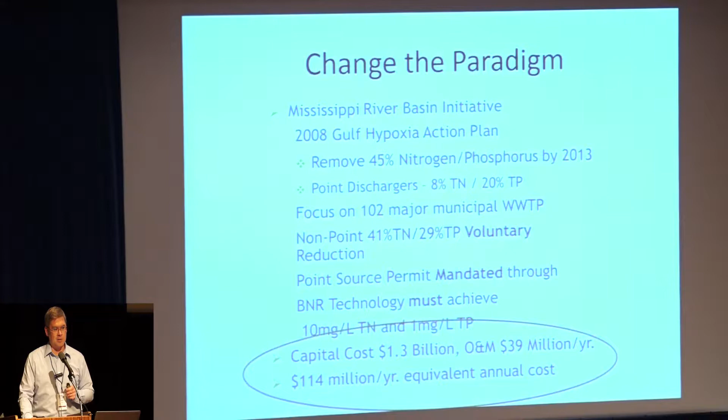Taking a different perspective, looking at things differently as we change the paradigm, because we have to. If you look at the wastewater pending regulations, the additional capital costs, the operations and maintenance costs - it's going to require us to change the paradigm of how we view management of water as a resource in our communities.

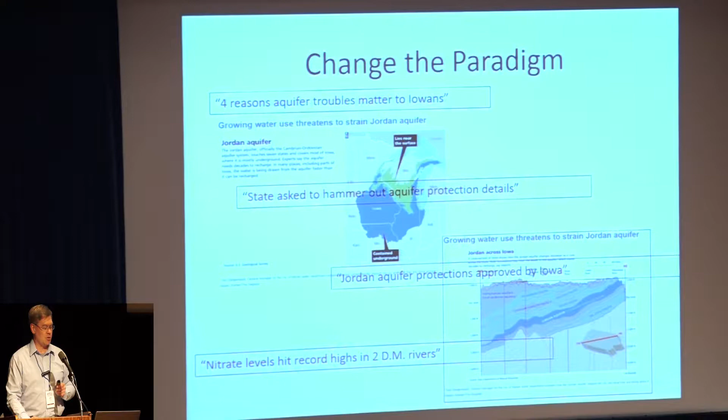If you look at the issues we're facing from a water supply standpoint, and the impacts that can have from an economic development standpoint, a community health standpoint, all those types of issues - we need to change the paradigm. At the same time, we're dealing with issues with flooding, we're dealing with issues with droughts, we have questions about future water supply in particular parts of the state.

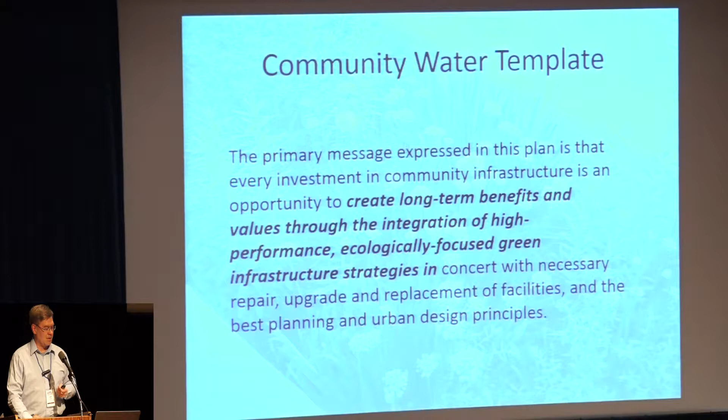So that's what we're going to talk about for the rest of the time we have this afternoon. The Iowa Economic Development Authority partnered with the City of Storm Lake last year to develop what we were calling a community water template. It's really looking at, from a community-wide perspective, how do we integrate and plan for water, wastewater, and stormwater in a holistic fashion. We're going to talk about how you renovate public-private properties, high-performance materials and systems, and the multiple benefits and values you can get from taking an integrated approach to infrastructure. Looking at how you look at your community and infrastructure as an asset, how you best leverage that portfolio to create long-term benefits and values through integration of high-performance, ecologically focused green infrastructure strategies. And with that, I'm going to turn it over to Jim Patrick to provide the city perspective, and then Tom Price will get into the template.

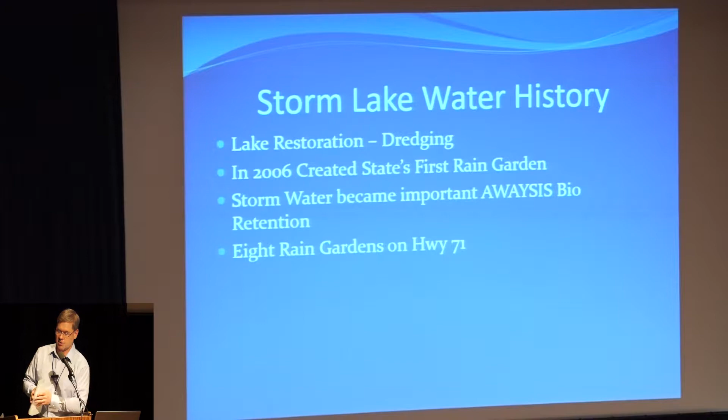Thank you. It's a privilege to be here to talk about Storm Lake a little bit and water resources. Again, our history in Storm Lake is tied to the lake primarily, and we've been doing dredging. We're on our probably second or third iteration of dredging, and on this iteration we're probably about 10 or 11 years into the process.

So taking care of water quality is important to us in the lake. It's one of the two fisheries for walleye in the state, and we try to do our best in taking care of the lake. In 2006, we had the opportunity to create the state's first rain garden, and you'll see some pictures a little later on, I think, on that one. When we put our resort in place, stormwater became even more important, and that was back around 2008, 2009. Being right on the lake and trying to sell the lake made it even more important for us to take care of stormwater. And then, along the way there in about 2008, 2009, we put in some rain gardens.

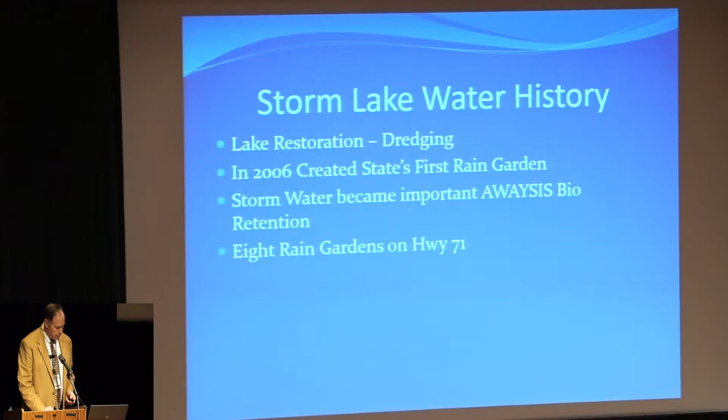So, keeping with the theme of what Jeff said, we as city managers or city staff a lot of times think about things being the same, and we become complacent and pretty well in tune with what we're doing. It comes natural to us, we've done it a thousand times, and nothing could go wrong, right? Well, think again.

Since 2010, council was kind of interested in stormwater to a certain degree. 2010 we had a shift in thinking, and stormwater management and environmental issues became so important that it became one of the 5 core topics in our strategic plan for the city.

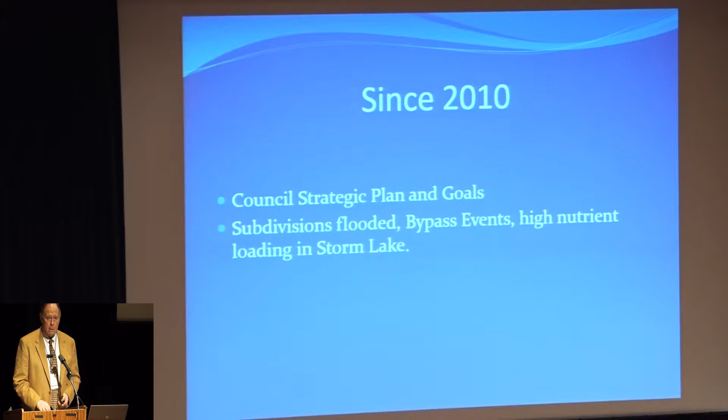Along with that, probably part of that, we had subdivisions that were flooding out. And when I say flooding out, a lot of times water would be up to the doorstep. We had bypass events in the city. Stormwater was a nuisance, I'll tell you that right now, flooding basements and flooding streets.

We were able to secure some FEMA funds to enlarge our wastewater treatment plant, put in some additional sewer mains, and do some work in getting rid of the I&I, the water we were dealing with.

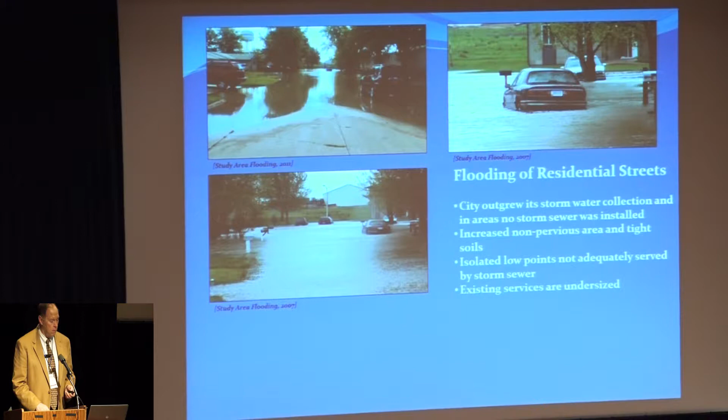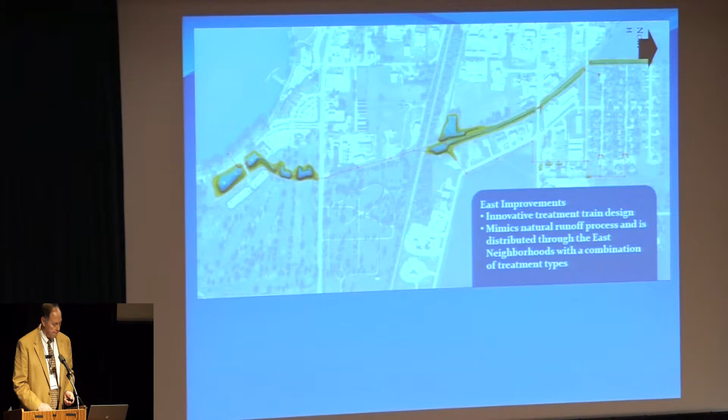Along with that, we started working on projects like the East Central project. East Central took care of the water in the Forest subdivision all the way down to the lake through a bio-treatment train, and Bolton & Menk was very successful in putting that together. In fact, last year, thanks to this conference, we were given an award for that project.

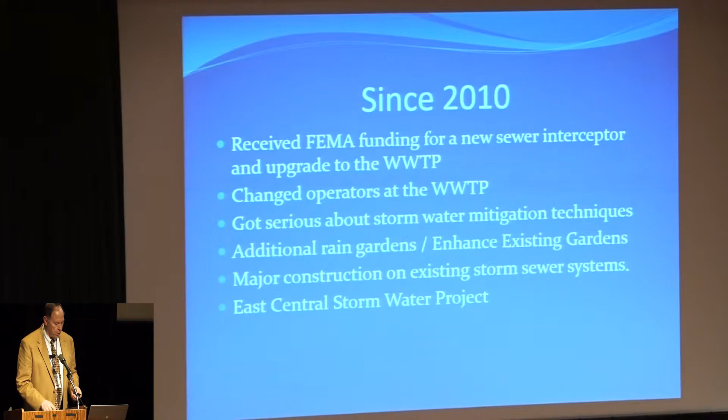But we got serious about stormwater mitigation issues, and we started to put in additional rain gardens, the bio-treatment train, of course, that you see here.

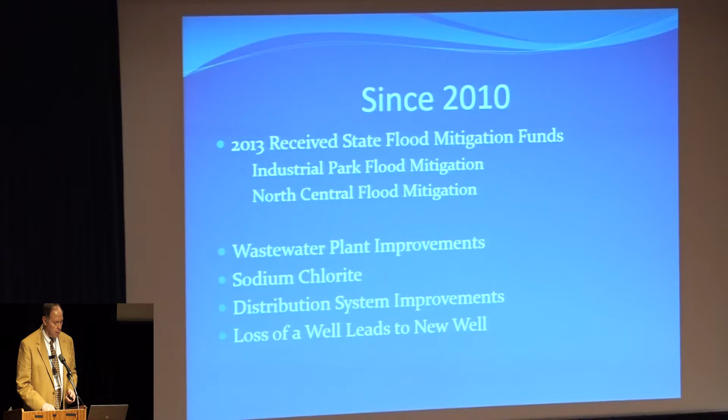Since then we've continued to move forward. We have 2 projects happening thanks to the state flood mitigation funds. We have the industrial park project, with a pre-construction meeting this Friday. It's a $1.6 million project to remove flooding and standing water in the industrial park, using micro pools, bioswales, and a treatment train.

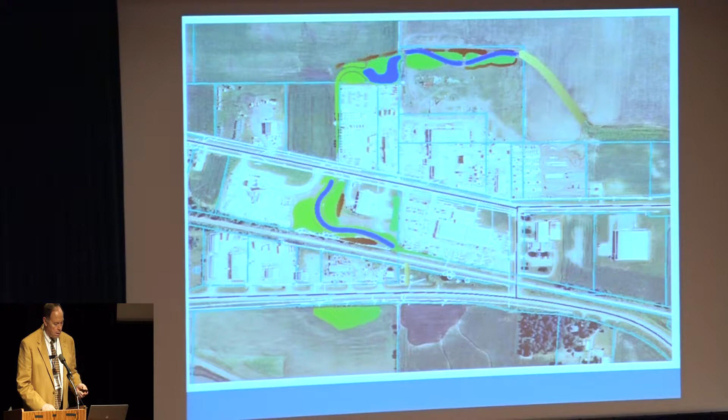We also have a North Central improvement project, about a $2.4 million project, if I recall right, Neil. Again, emptying the stormwater from 2 subdivisions behind the high school and cleaning up the water issues there, treating it in an infiltration pond, and then bioswales on out to a discharge point.

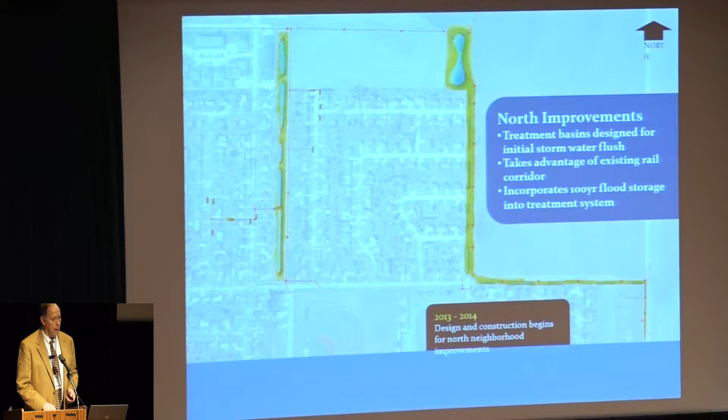Recent events continue to shape who we are. We've passed one of the first post-construction stormwater ordinances, I think, in the state. We were accepted as the demonstration community for best management practices in the state. It's a humbling experience. We have a lot to do.

We haven't arrived yet. We have a list of projects now that, as you'll see in our further discussion, give us a whole laundry list of things that need to be done. This template is not a starting gun. It's something we've been working on for a while, but this template is very valuable to the city because now we have a list of projects, and it becomes useful.

I was contacted about a week ago on some possible funding on flood mitigation issues, and it's very easy to go back to the document and say, here's our highest priorities, and this is why. Thanks to Neil, we were able to get some engineer quotes and get the grant in within 2 days.

So the template is a great resource for taking care of water, not only stormwater. We've included wastewater as well as drinking water and have plans in store for all of those.

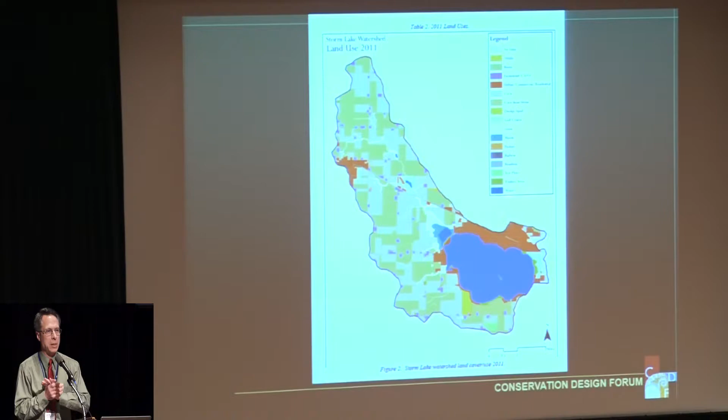I think we talked a little bit about Storm Lake in Buena Vista County, in the northwest portion of the state. Storm Lake is part of a larger watershed, but the focus of this project was on the city of Storm Lake. So there's recognition that we do have a larger watershed here, but this project was about urban green infrastructure. That is the focus of what this plan is about.

We had a number of goals that were set out very early on. The big part really in the beginning was integration of the stormwater, wastewater, and water supply, and integration of that with what's traditionally gray infrastructure—streets, storm sewers, those sorts of things—trying to make our landscapes and every surface really provide multiple benefits and hold its own water.

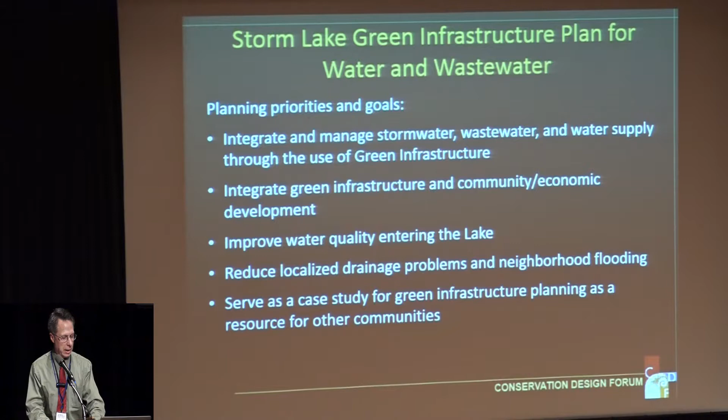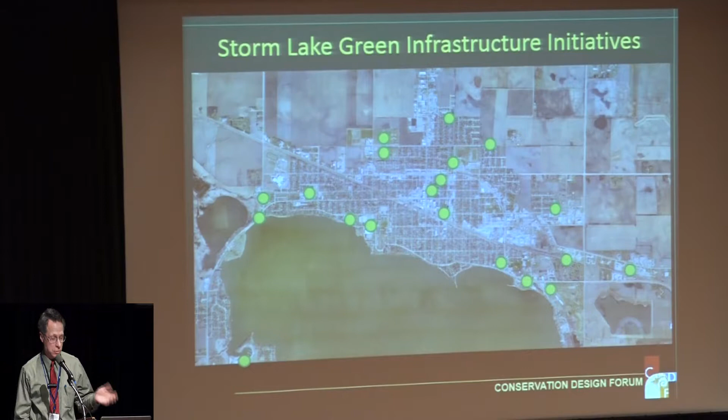That was really the focus of a lot of these goals, with a big part of that being protecting the lake. As Jim said, Jim's really done a ton of work throughout the city, along with Bolton and Menk, and it was great that Jeff got into this and we all got together because they've really done a lot of work already. So this was just building on some of that early work and trying to formalize some things in terms of what can be done.

In terms of the outline of the project, it follows a fairly basic planning process: analysis of existing conditions, establishment of performance goals, develop the plan and conduct the analysis on that plan, and then come up with implementation.

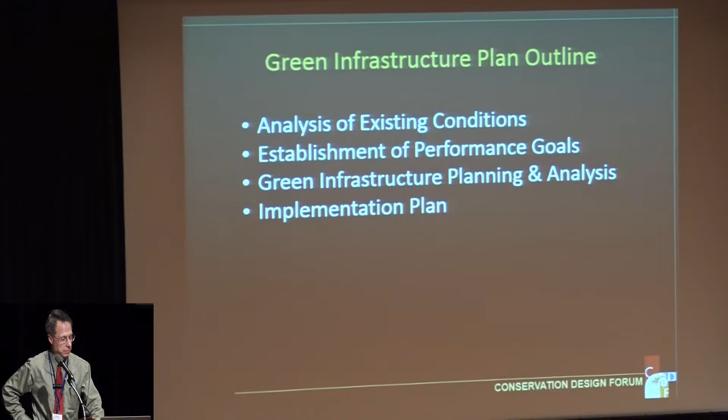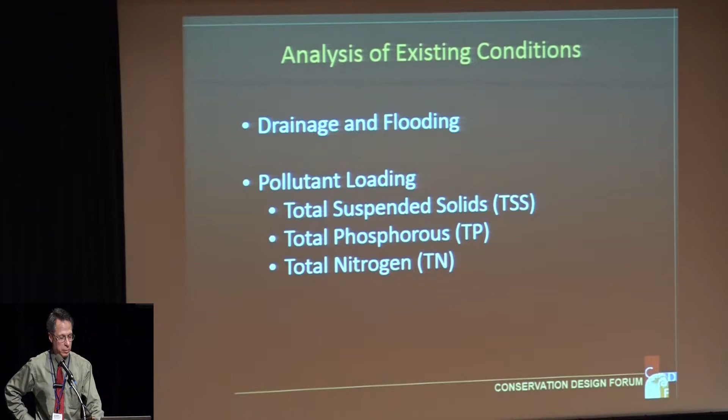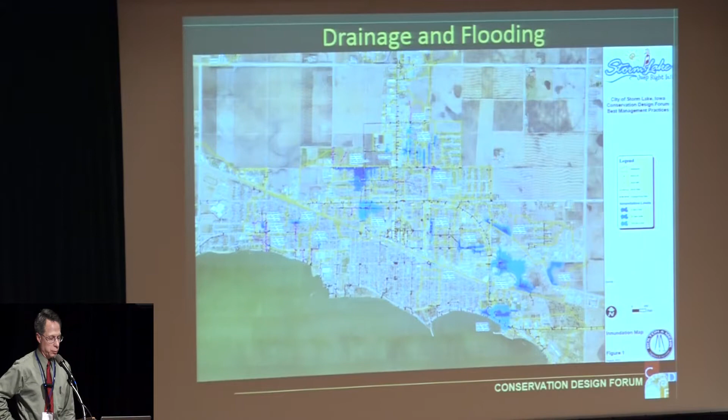For existing conditions, we looked at drainage and flooding, so there was a quantity portion of this, not just water quality, and we also looked at pollutant loading. Some modeling was done throughout the city, and this highlights—the darker the blue, the more frequent the flooding. This highlighted those areas that were problematic and delineated the drainage areas, helping guide us on where some projects might go.

We also did some pollutant loading analysis, which was really just based on land use—the simple method, not terribly complicated, but it really helped identify where the heaviest loads would come from, and then target work in those areas.

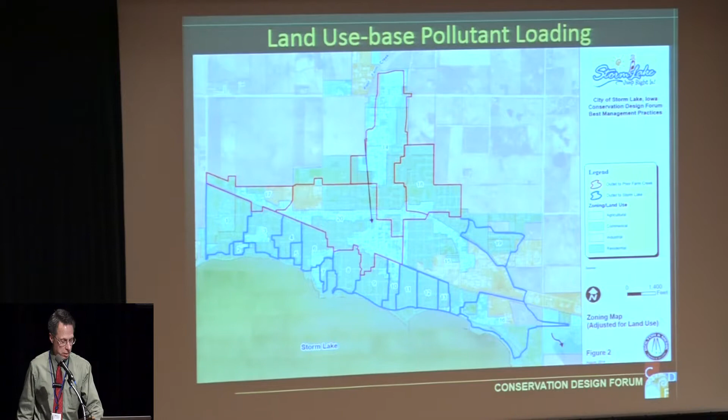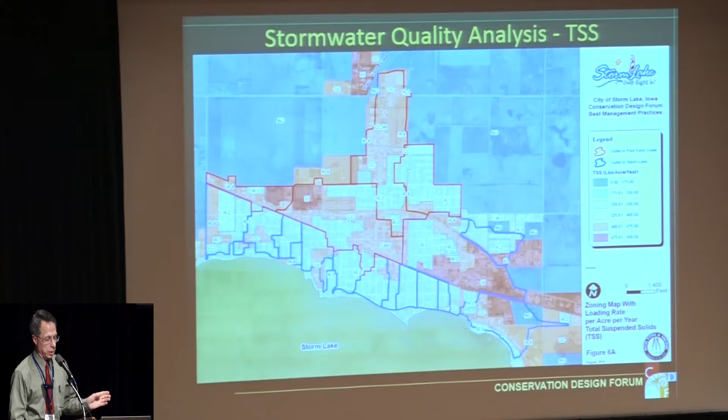We did this for total suspended solids—the darker red are the areas of the highest pollutant loading, the blue are the areas of the lowest total suspended solids loading. Same thing for total phosphorus, and then finally for nitrogen. Typically, again, the darker colors are the higher loading areas.

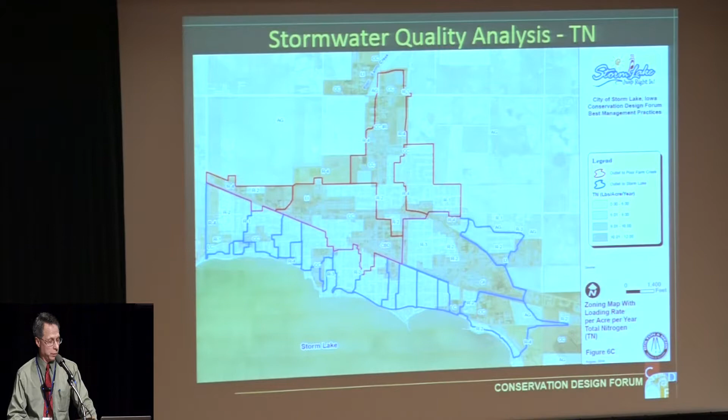So we know where those land uses are where we want to focus our effort. We developed some performance goals, looking at a number of different things both nationally and locally. We ended up staying largely with the State Stormwater Manual and SUDAS, and what Storm Lake had already put into their own ordinance. The goal here is retrofitting the whole city to eventually meet these standards, along with some standards for wastewater and water as well.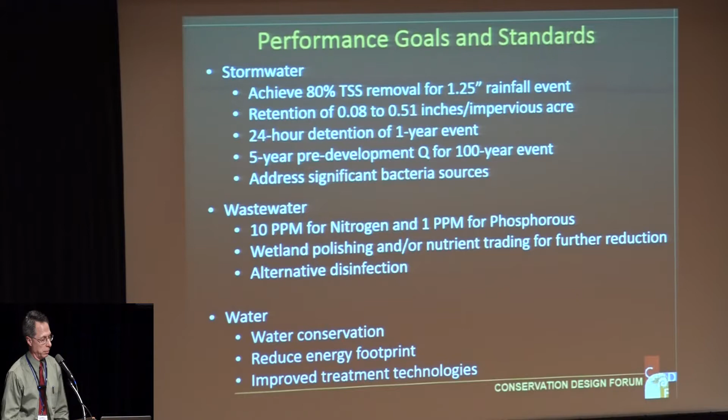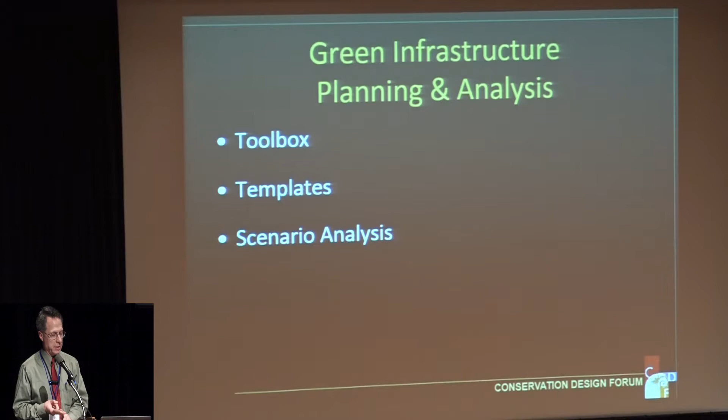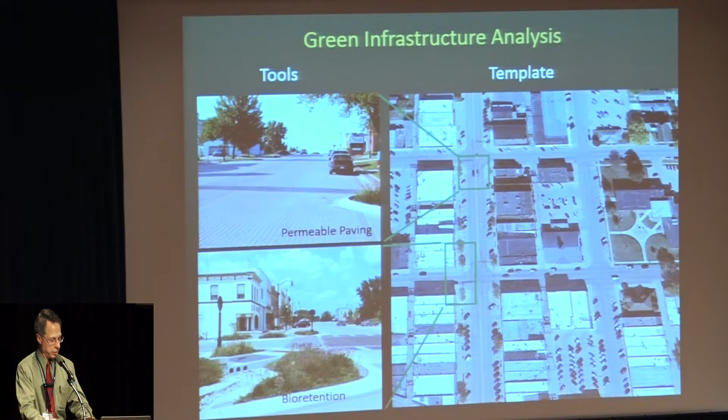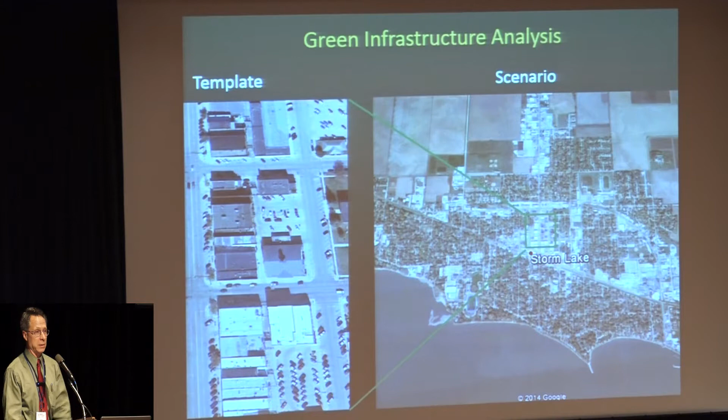The approach we took was the idea of a toolbox, and these sort of build up to each other—toolbox, then templates, then scenarios. To illustrate that, on the left here we've got a series of tools: permeable paving, bioretention, and some others I'll talk about. Those come together in a series of templates, showing how we might integrate those tools into a larger land use template. Then we take each of those land uses, aggregate it, essentially distribute it around the watershed, and see what that does in terms of the reduction in pollutant loads.

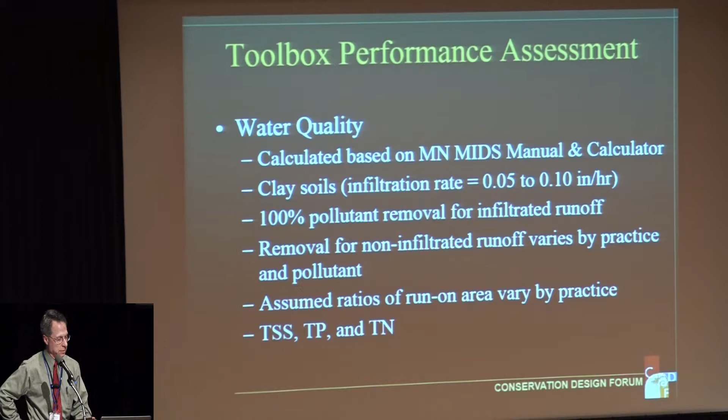So some of the tools in the toolbox are listed here. I'll go take a look at a couple of these. We did assessments on what the performance of each of these tools would be using some standards. The Minnesota Minimal Impact Design Standards Manual was a good resource, and we used that to generally estimate what the

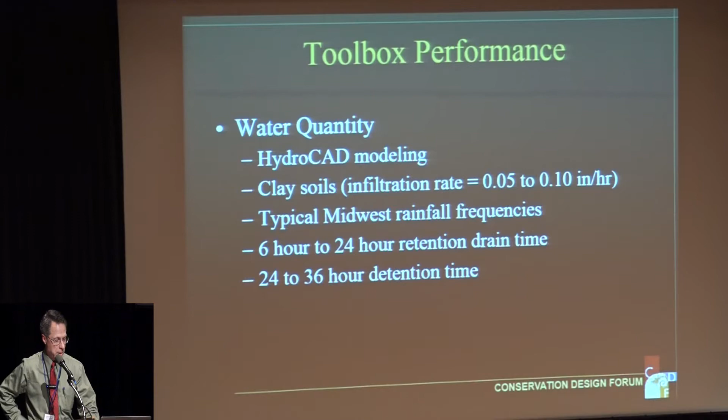performance of each of these practices would be from a water quality perspective. And then we did water quantity modeling as well. In this case, we used HydroCAD, but you can use many of the stormwater methods. One thing you'll notice, we've got clay soils, quite low infiltration capacities, but these practices still can really work well to temporarily store the water and slow it down and give it a chance to evaporate and infiltrate.

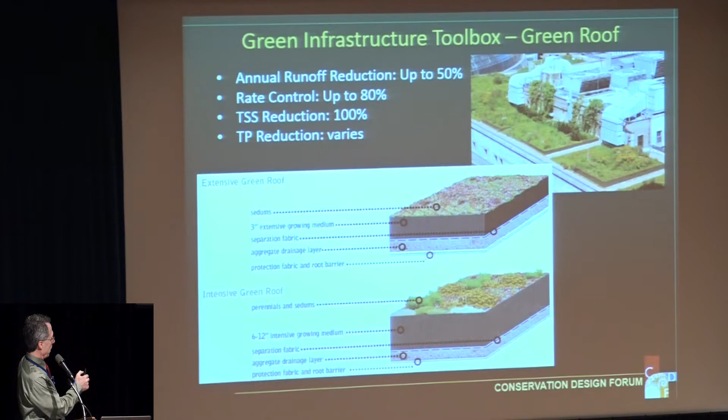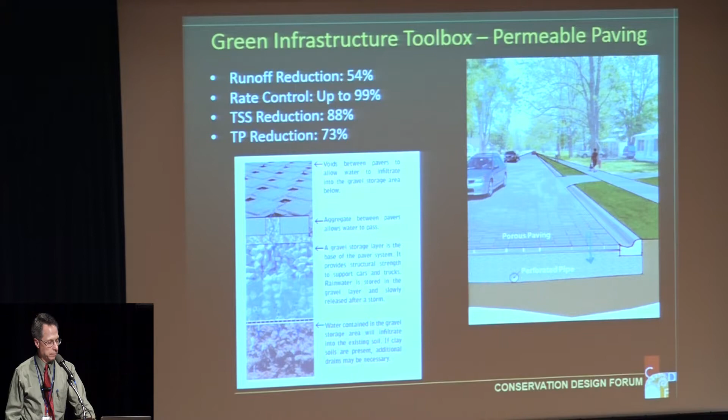So green roofs, we looked at, and for each of these, we've got expected performance for each of these different practices. So for green roof, we provide some different examples. Same thing for permeable paving, a little bit on how it works, what it looks like, and then again some example projects to show on-the-ground implementation.

Same thing for bioretention, using a range from very urban downtown situations to more residential areas to campuses.

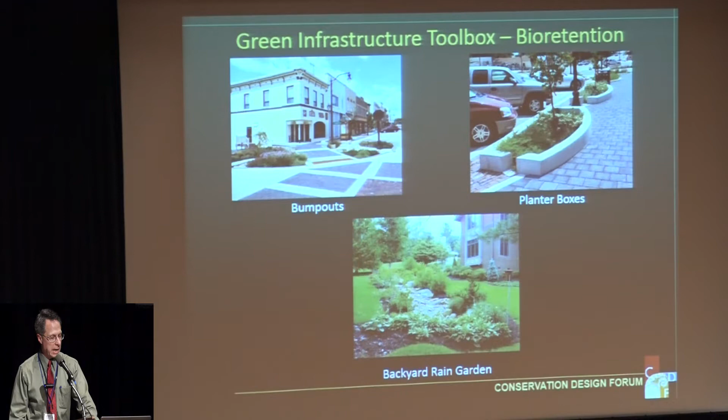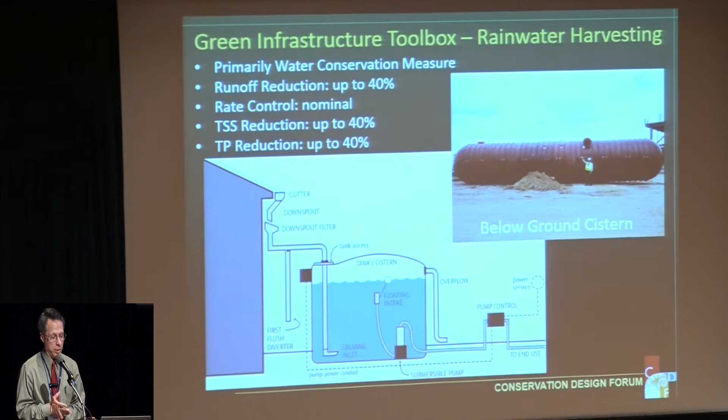Naturalized swales, naturalized retention. We also looked at rainwater harvesting for use in irrigation and other practices, so integration of the stormwater and water for water conservation. That can happen at very small scale in terms of residential to the very large scale, looking at more commercial sized projects that really have a large reduction and water conservation piece to them.

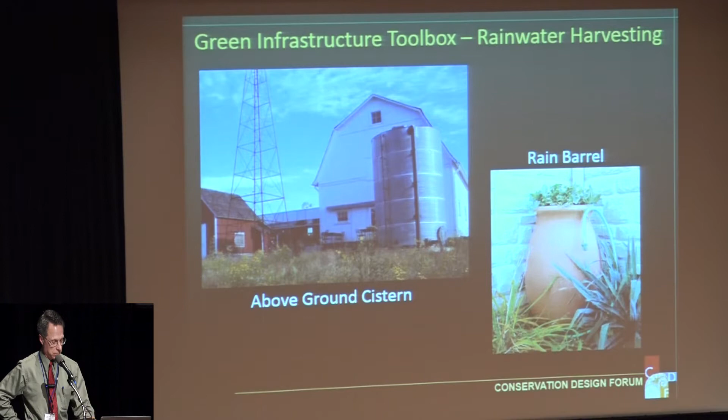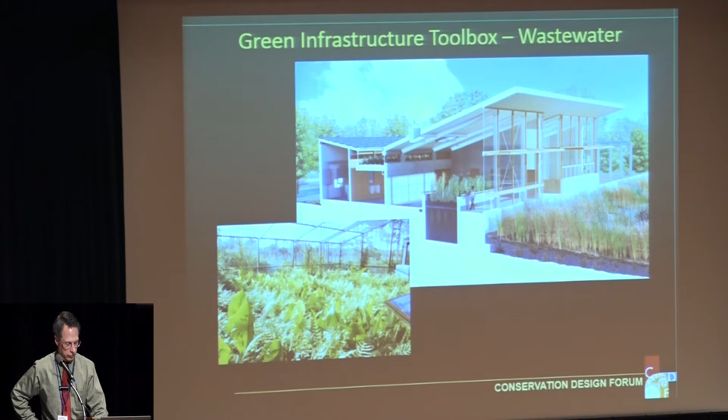And then finally at wastewater, we looked at some upgrades to existing plants, but also looking at some areas where we can do some more distributed wastewater treatment, on-site treatment that can be done in ways that can be amenities. The picture on the lower left is actually a wastewater treatment facility, using plant material in a greenhouse setting to provide wastewater treatment to meet full standards.

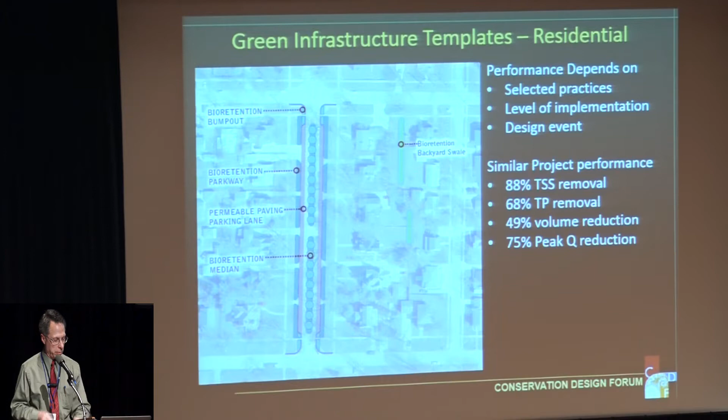So those are the tools, and then we arrange the tools on a range of standard templates, residential being the first. We can do permeable paving in the streets, bioretention distributed throughout, and then some precedent projects - this one in Milwaukee, Charles City was permeable paving, Carbon Cliff, Illinois, and then looking at some multifamily as well.

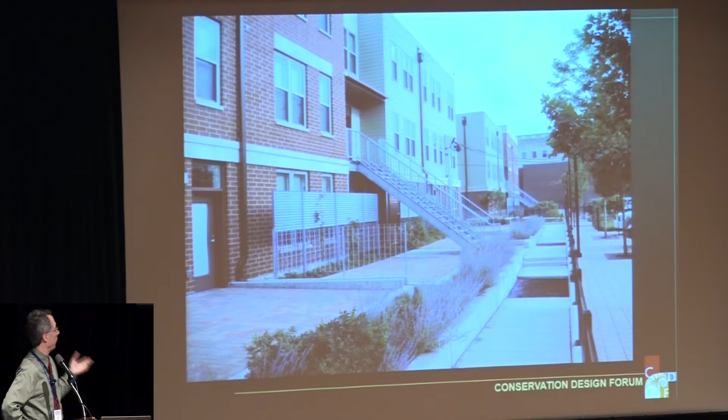This site, other than the building, almost the entire site is essentially water holding landscape. So all of the landscape you see there, the paving, is all either bioretention or permeable paving to hold the water on the site. And then some analysis of how the performance of those...

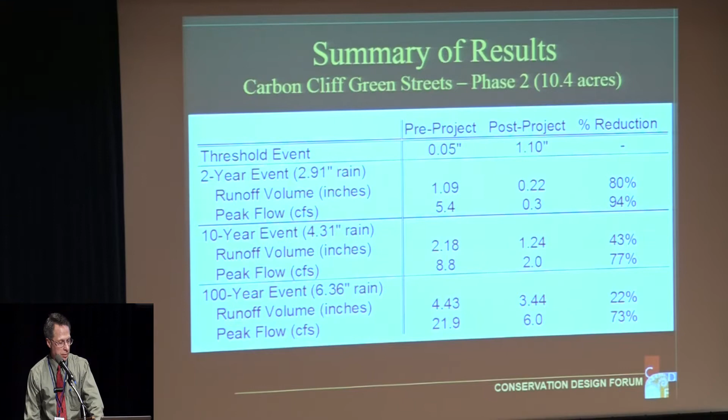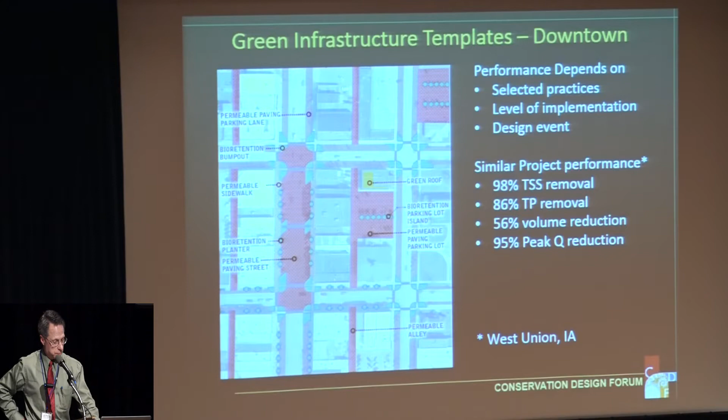And looking at commercial areas - again, just some precedent projects on how we can get it to meet these standards on even existing areas.

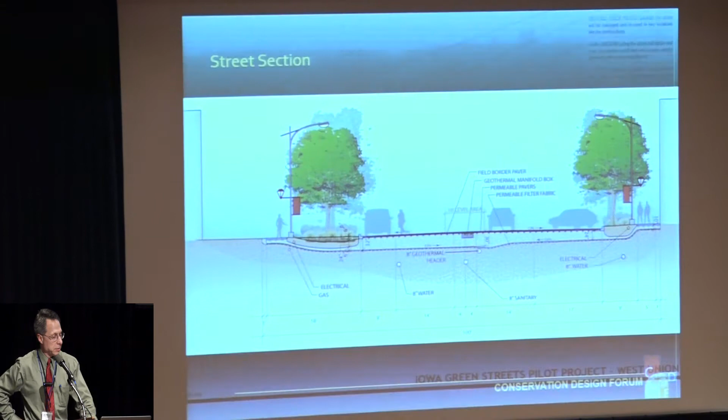And then finally, in downtown areas, this is West Union, a project we worked on with Jeff. Essentially the entire cross-section is water storage. There's planters, and you can see here, essentially that gravel's building face to building face. And then bioretention bump-outs, permeable paving streets.

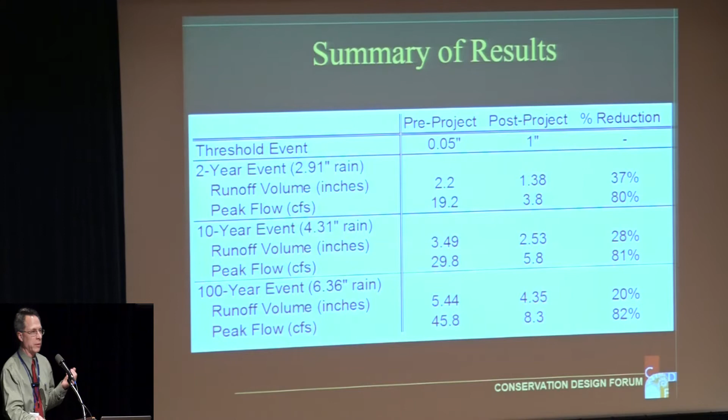And then again, analysis of the results - we're seeing analysis even up to a 100-year event that we are getting peak flow reductions of 80% reduction. So these aren't just water quality practices; they can be used to address the drainage problems in these areas as well. And then some campus examples, some schools.

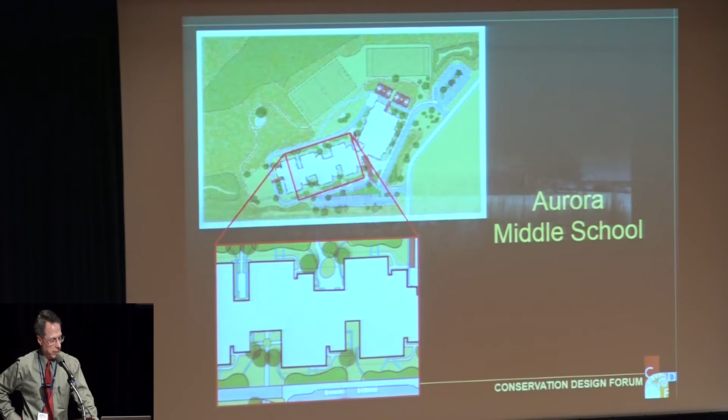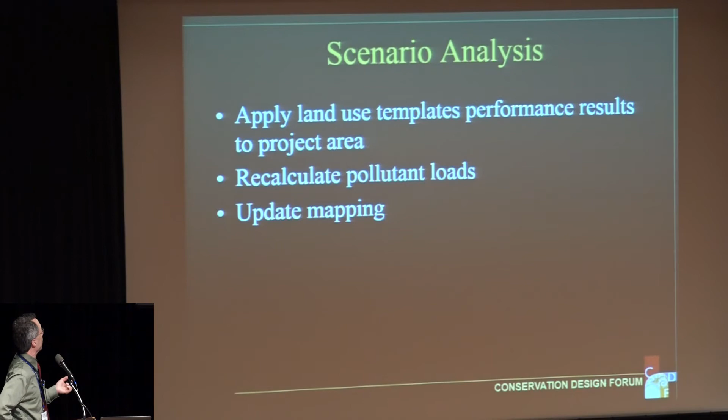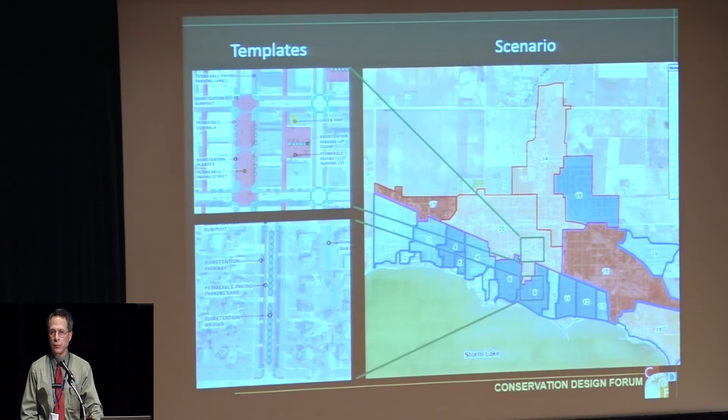And then we took these - we've got the tools and the templates that we talked about - and applied these throughout the city. What if we did this throughout the whole city? That's what's great about Jim and Jeff, taking the long view. This is not going to happen overnight. We're not advocating for tearing up perfectly good streets, but as streets need to be repaved, look at doing some of these things. As parking lots need to be repaved, as landscape goes in, take those opportunities to integrate the green infrastructure.

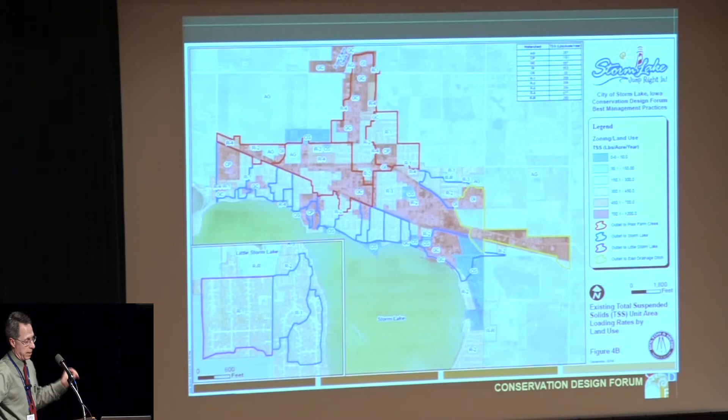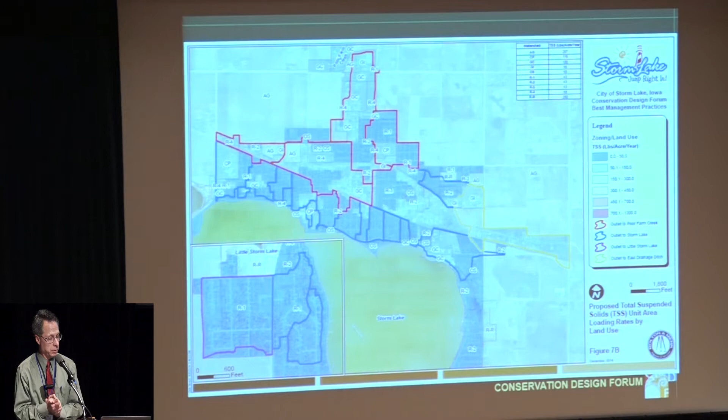And if we do that, what would be the outcome? This is the total suspended solids map I showed before, with the red being the areas of highest loading. If we did this throughout the city, we essentially turn the whole part of the city in terms of pollutant loading analysis to the blue areas. Same with total phosphorus, with the darker colors being the higher loadings - essentially turned it all to the lowest loading rates.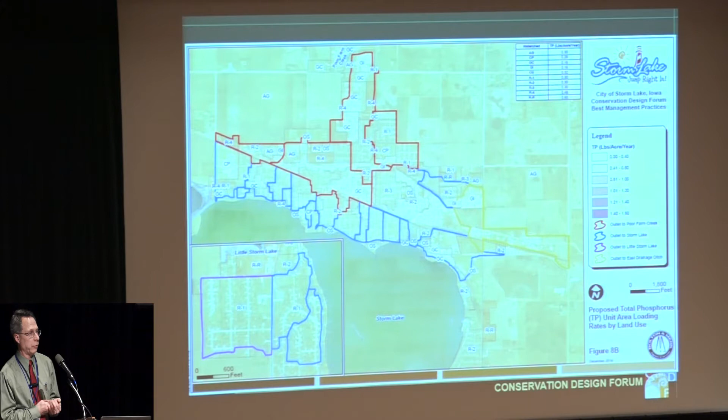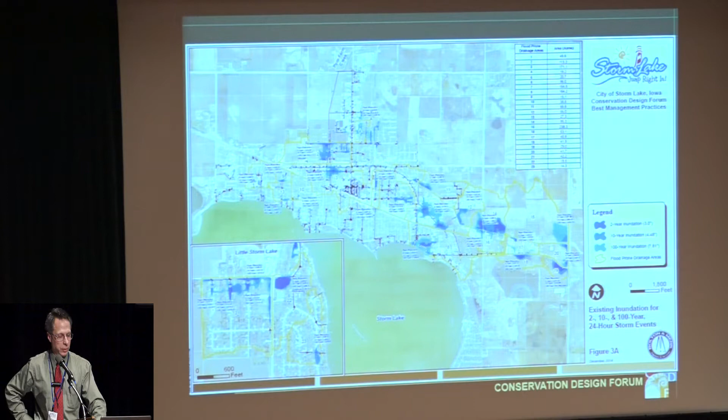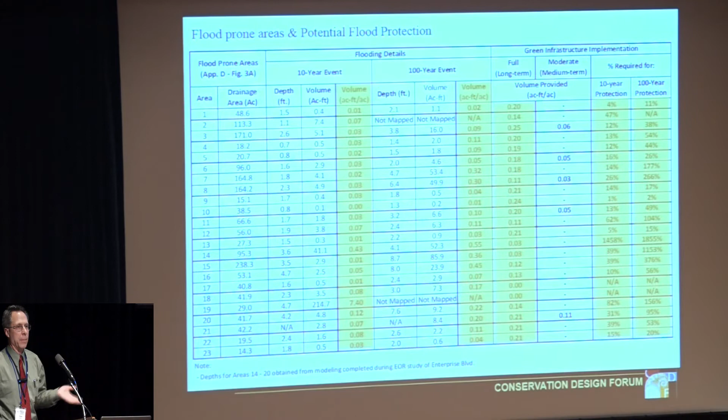So overall citywide, in the long-term plan, we're getting about 80 to 85% reduction in total suspended solids, and 70 to 75% reduction in total phosphorus, while also addressing some of these drainage problems. We also did an analysis on the drainage, looking at how much storage we actually need in order to address each of those flooding problems.

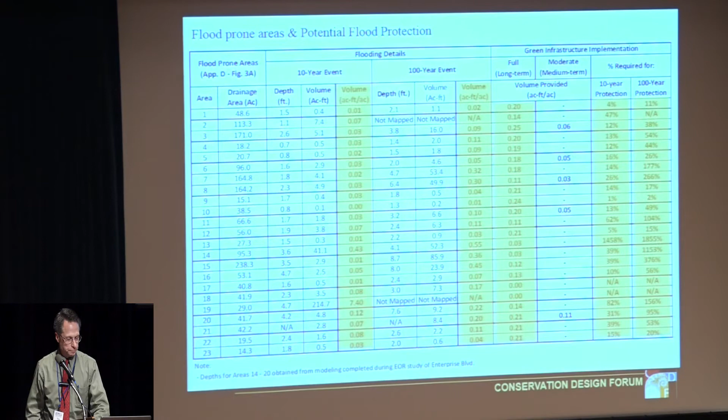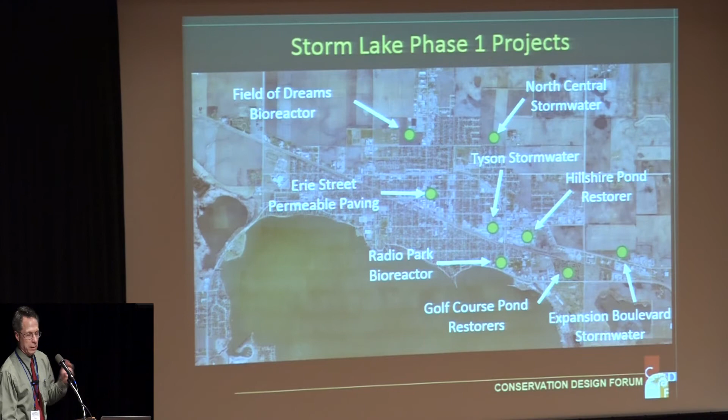As far as implementation goes, there's really two parts to this. There's a programmatic piece—as streets are getting repaved and other infrastructure projects need to be done, looking at doing those with permeable landscapes. But there also needed to be some more site-specific projects. Jim already talked about some of these, but there are additional ones.

You'll see Erie will be their first permeable paving street in Storm Lake, and we're also looking at some bioreactor areas to help treat some of the agricultural areas. We're also looking at their two processing plants, and the stormwater runoff that comes off those areas from product trucks moving in and out, and some of the wash-off, to help keep that out of the lake and restore it. So this is just a sampling of site-specific areas in addition to the programmatic elements.

And Jim, I don't know if you want to talk a little bit about the process of implementation and how you plan to move forward.

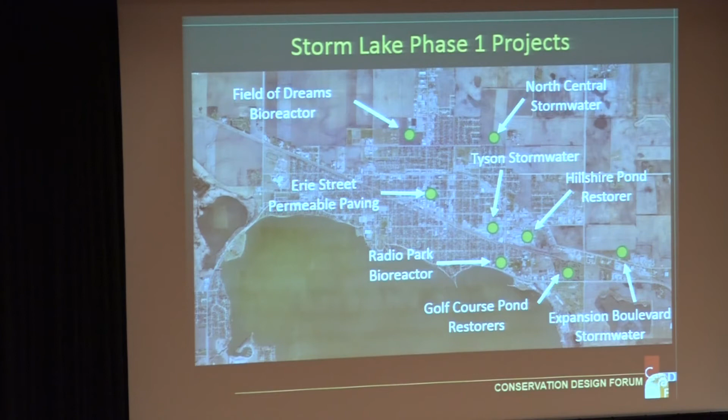Thanks, Tom. I think as we move forward, this has been a great tool to put together our capital improvement program and also start looking at ways of seeking grant funds, because now we have a focused target. We have a focus on where we want to go, what's most important to the city, and how much it's going to cost to achieve those results. This has been a great tool—we've already used it.

I might mention, we haven't explained what a restorer is. A restorer is hydroponics on steroids, is what I like to call it. It's a floating island of plants. It takes the wetland idea—in fact you can put them in wetlands—and puts it on a floating island, circulates the water through it, and reduces your nutrients as well as your bacteria. It takes care of the bacteria and TSS.

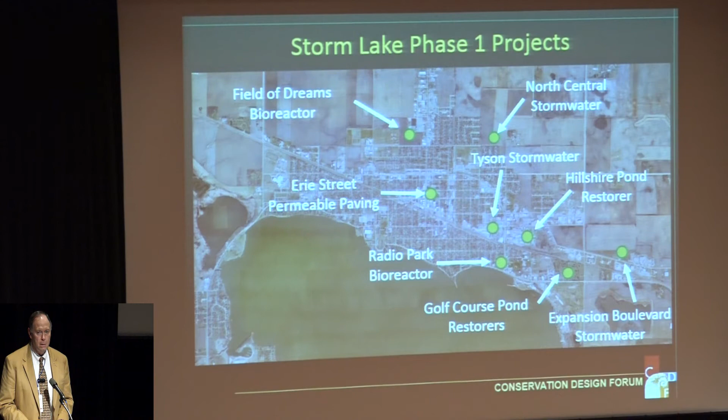I think we're ready for questions, aren't we, Pat? Any questions? We explained it perfectly. Go ahead. I saw a slide up there about the reduction in the 1% annual flood.

Did you say there was an 80% reduction in peak or volume? Peak. The volume reduction is going to depend on soils, but based on the modeling, we ought to be able to get kind of a 20-30% reduction in volumes, depending on the land use, even with the clay soils. Is that just storage and attenuation, or is it actual infiltration—you're not infiltrating all of that?

The thing to think about is when you put in these practices, essentially the whole street cross-section—for example through permeable paving, or a whole parking lot—that whole area becomes an infiltrating area. So even at a tenth of an inch an hour, if you hold that water for 24 hours, that's 2.5 inches of runoff you can infiltrate. So it's sort of substituting space for time, if you will. You can't get it in very fast, but you have more area to do it.

You mentioned the water quality trading project. Who's going to provide the numbers that underlie that project for trading this and that? Great question.